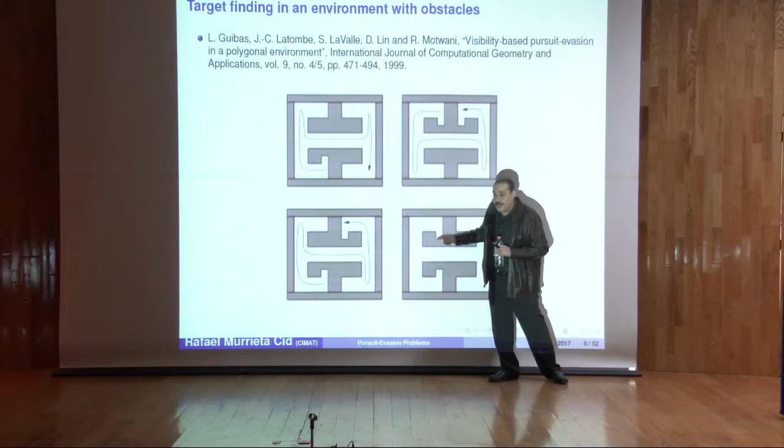So basically, I have to accomplish my first goal. Those are the problems: there are three versions. One is to capture the other, to get closer than a given distance. The other is to try to maintain the other in view. And the third one is one of the guys wants to find the other.

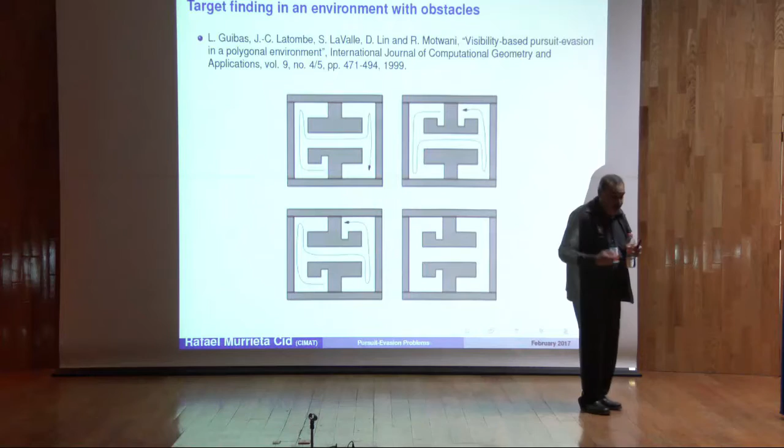And of course, there are some nice applications for that. For instance, automatic cars in supermarkets or airports that can follow you, carrying your luggage or some stuff you want to get with you without carrying it yourself. For instance, this thing.

Or surveillance and monitoring of children. For instance, you can get a robot that is always maintaining visibility of the child while you are, I don't know, in your office and your child is in your house. That would be really nice, and it's not about war, no problems—it's just, I want to surveil a child.

Another application may be convoys of cars, where one car follows another. The first car is driven by a human being, and the other cars automatically follow the first one.

That would actually be very good to reduce traffic jams, because there would be coordination. So there's some possible application. I hadn't worked on drones before, but when Jose invited me, we both thought the theory we'll describe later may be used for drones. It would be very nice to have drones chasing one another, or maintaining formation. So that's the kind of application for future work we have in mind.

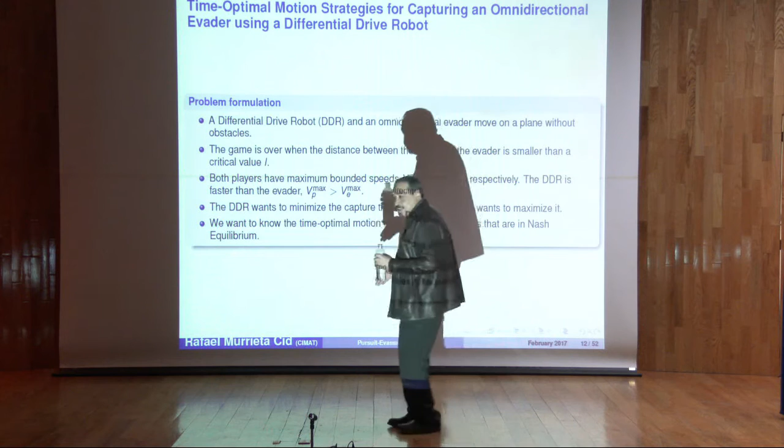We have a differential drive robot and an omnidirectional evader moving in a plane without obstacles. First, what is a DDR robot, a differential drive robot? It's a robot with two wheels that have two independent motors and can be controlled independently, so it can turn in place without translating, unlike a car.

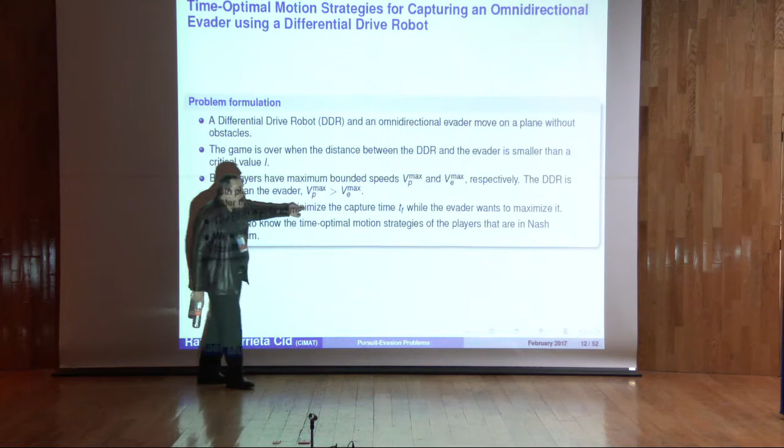Both players have maximum bounded speeds, Vp and Ve, and the robot is faster than the evader, but the evader is more agile. The problem is this: the robot wants to minimize the capture time, and the evader wants to maximize it. So it's a min-max problem. If the capture time is infinite, the evader wins; if the capture time is finite, the pursuer wins.

In these kinds of problems, there are two main games. One is called the game of degree, and the other is the game of kind. The game of kind answers the decision question: which player will win? The second question is how the players should move in order to achieve their goals. So one is just a decision question - who is the winner - and the other is how should the players move.

There is a known problem related to this one, called the homicidal chauffeur problem. In it, you have a car in an unbounded parking lot, and the car wants to run into a pedestrian, while the pedestrian wants to avoid that. The solution to that problem was partially found in the 1960s by Isaacs, the author of the book.

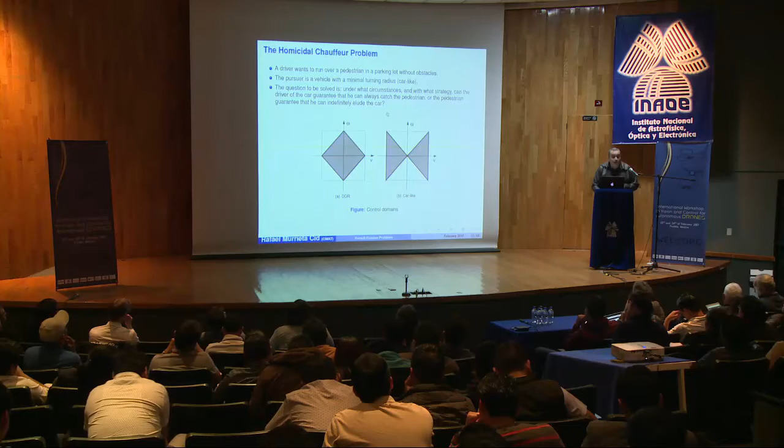This is the difference with the homicidal chauffeur problem. And a way to model the problem is like that.

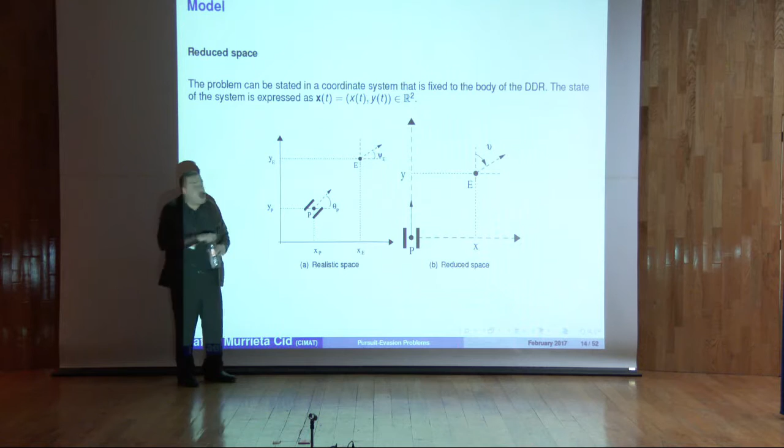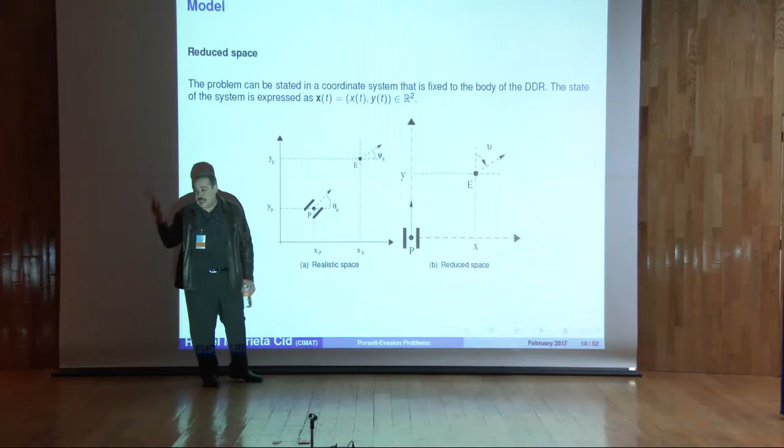You have the Euclidean plane in a reference frame, where if you use a global reference frame, you need 5 numbers to specify the configuration of the system. Those numbers are the position of the pursuer and the orientation of the pursuer, we need 3. And 2 numbers for the position of the evader. The evader is omnidirectional, so basically you don't need a number to describe its orientation. So in this global reference frame, you need 5 numbers, but there is a trick that is called the reduced space.

In this space, everything is local relative to the pursuer. Imagine you are an observer seeing both players playing, far away from them. In this case, you are seated on the pursuer. In this local reference frame, you only need 2 numbers to define the position of the evader with respect to the pursuer. The y-axis of this reference frame is parallel to the wheels of the pursuer. So basically, you get a dimension reduction from 5 to 2, and that makes life easier, because in 2 dimensions you can visualize the solution, while in 5 dimensions, no way. It's like a deterministic PCA, we are reducing the dimension.

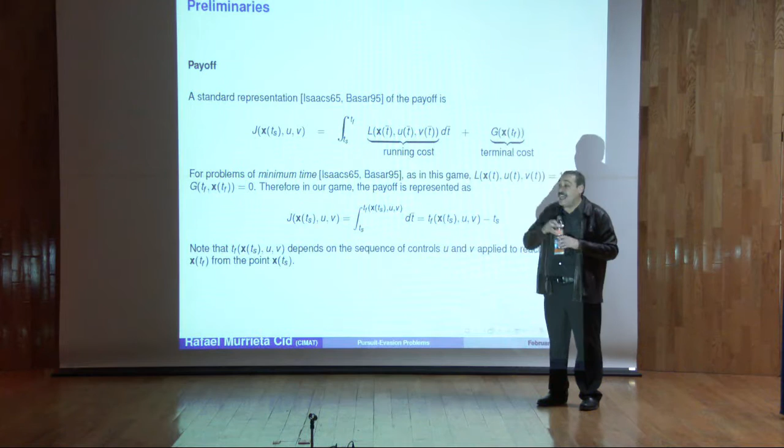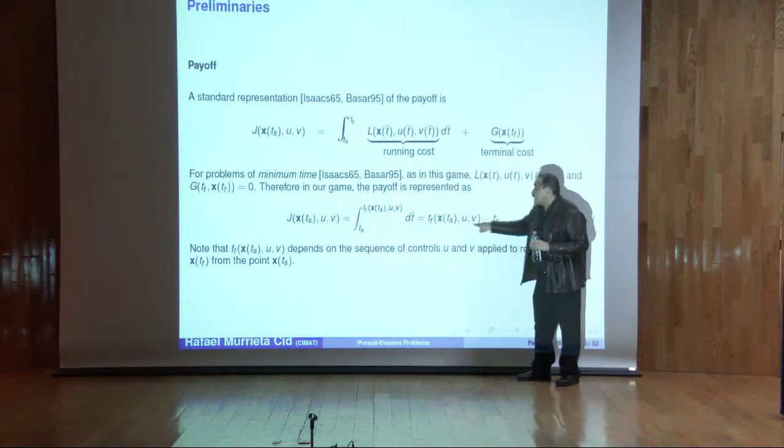There is something called J, the payoff. It's the thing that one guy wants to minimize and the other guy wants to maximize. In the case of this game, it's just time, the elapsed time, which depends on the controls and on the trajectories that the guys follow. But at the end, what matters is the time.

And V, the payoff under the optimal action of the guys, is called the value function of the game. What we basically want to compute is what is unknown. The value function of the game is the payoff under the optimal actions of both guys.

And what we want to get is the Nash equilibrium strategies for those guys. A strategy or a policy, for me, is synonymous, it's just a function. The input of the function is normally the state, and the output of the function is the controls. There are open loop motion policies and closed loop motion policies.

An open loop motion policy is something in which the input is time, so basically what is governing everything is the time. A closed loop motion policy has an input that may be the state, the position in this reduced local reference frame, or even the observation, measures from the robot sensor. But basically, a motion policy is a function that has an input, typically the state, and an output, typically a control.

And this is the tool that we are using: the Pontryagin maximum principle. What is this thing called H? H is called the Hamiltonian of the system. The Hamiltonian of the system in physics is a measure of energy - it's measuring the energy of the system plus the time, or the payoff, that in this case is the time.

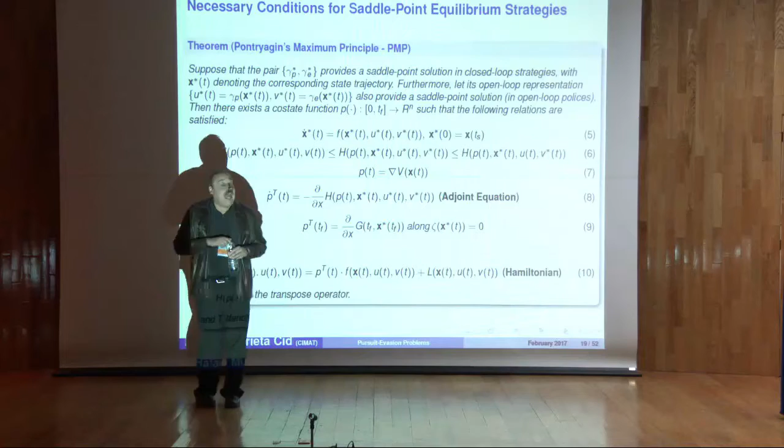And there is something called the adjoint equation that is basically the partial derivative of the Hamiltonian with respect to the state. So to summarize the method: you get a differential equation, you solve this differential equation, you get the gradient of the value function - this thing, what is unknown - and you use that to compute the actual trajectories of the players. The Hamiltonian is a direct function of the controls of the players.

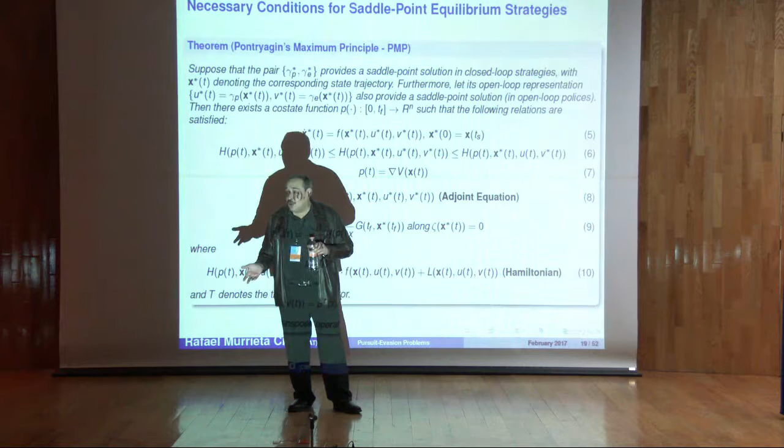One guy wants to minimize the Hamiltonian, and the other guy wants to maximize the Hamiltonian. So what I would like to be remembered is that based on a Hamiltonian, the maximization and minimization of the Hamiltonian is equivalent to solving a differential equation, and with this differential equation, when you solve it, you will get the trajectories. And that's it, that's all the theory.

Now, some results. The optimal controls of the players are the following: for the pursuer, either to move in a straight line at maximal speed, or to turn in place at maximal angular speed. Those are the optimal controls. If you integrate that, you get what we call the optimal motion primitives, which are basically straight lines or rotation in place. And for the evader, the optimal motion strategies are just straight lines in some given direction.

The second question is, who is the winner? And the winner is defined by something called the barrier. Basically it's a dot product between the motion direction of the system, called F, and the normal of a circle that represents the possibility of capturing the evader. So basically, if there is a motion direction that gets into the circle, there is the possibility to capture the other guy, which is equivalent to having a dot product that is smaller than 0.

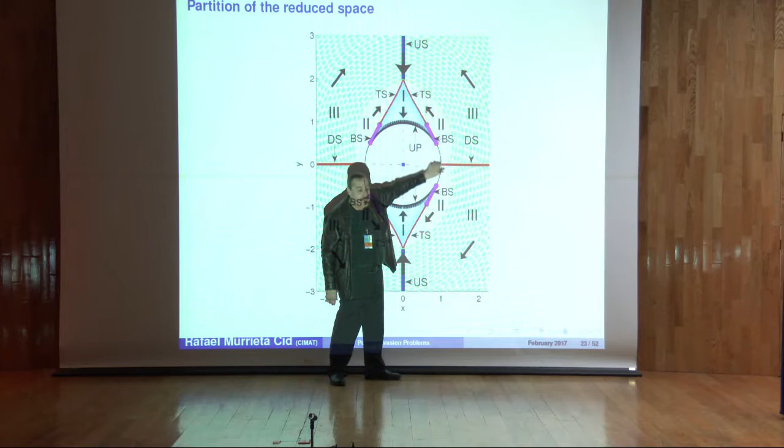And now I will show you the motion policy graphically. This is the motion policy, this is the reduced space. The pursuer is here, the wheels pointing in this direction - this is perpendicular. Let me simplify this.

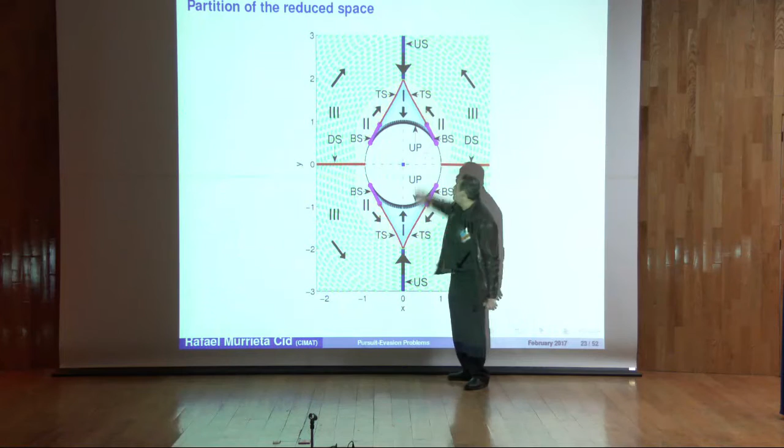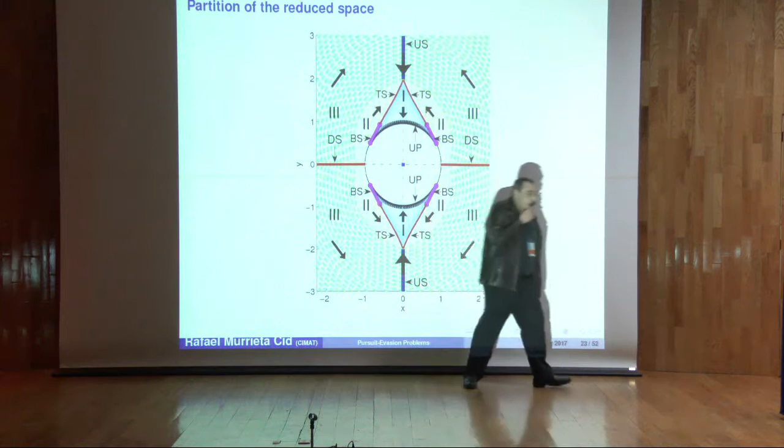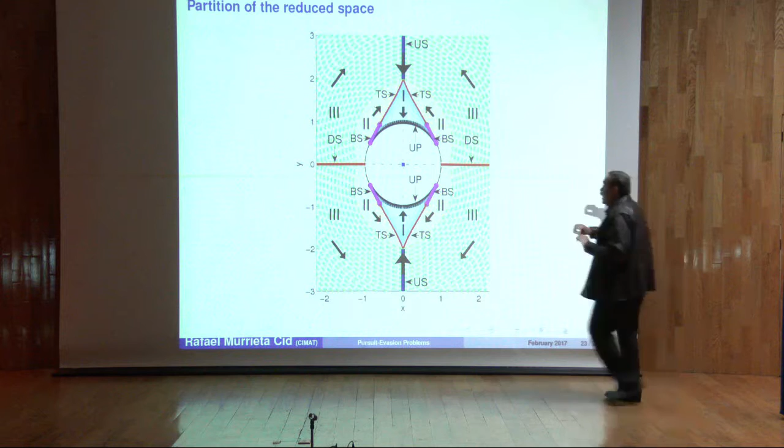Good question. The difference between the yellow and the green is: in one case, you will catch the guy with the wheels pointing in the direction of the line between the center of the reduced space and the body of the evader, and in the other case, you will catch the guy at some angle, not in front of them. But in both cases, the optimal control is the same, just to turn in place. And if the evader is here, the optimal control is just to move in a straight line.

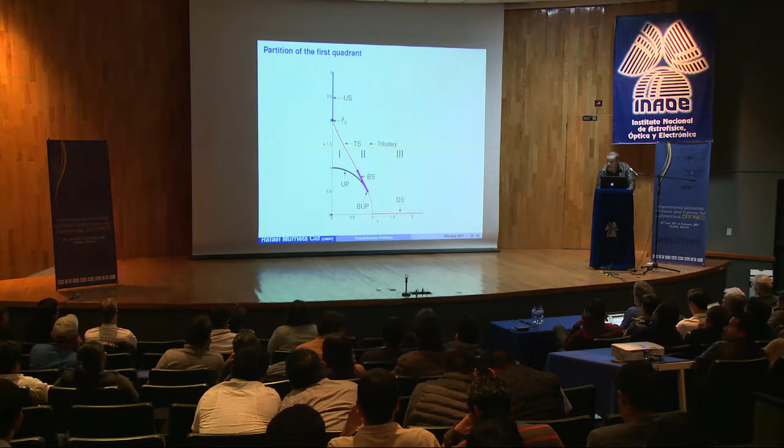So let me show you an example. I hope that will help. This is the optimal motion of the two guys, just to move in a straight line - this is the pursuer, that is the evader, that is the reduced space from the point of view relative to the pursuer, and this is the Euclidean plane. Let me show it again.

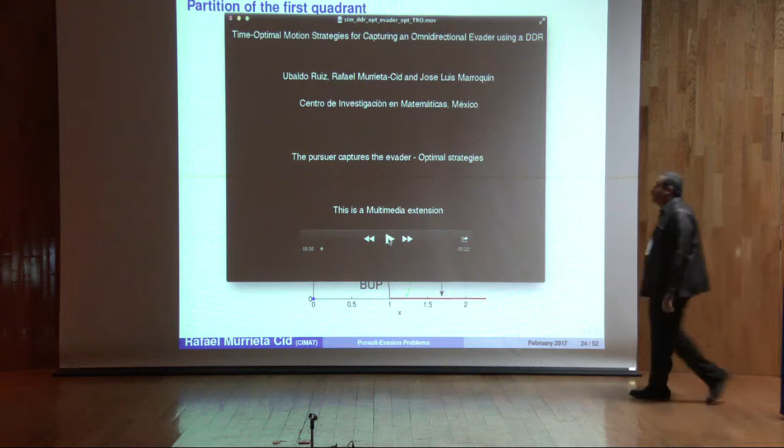This is the evader, moves in a straight line. This is the motion policy that maximizes the capture time, and this is the one that minimizes the capture time. One that I think is more interesting is when the evader avoids capture.

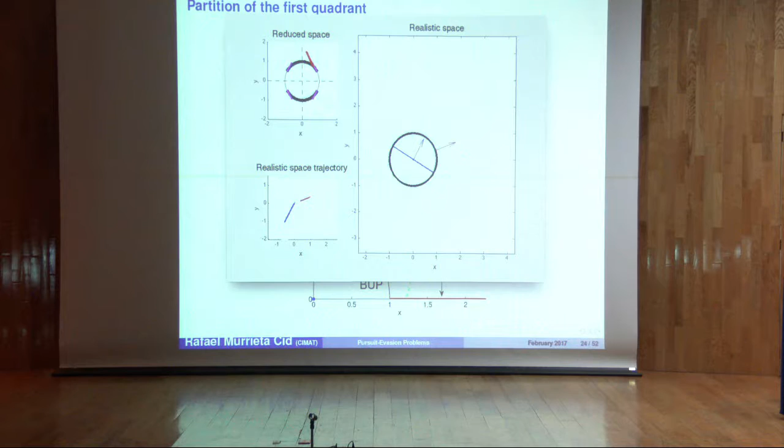This is the most favorable initial condition for the pursuer, just in front of him. But the barrier is closed, and it separates the plane into regions. At this moment, the system starts sliding over the barrier. At a point, the pursuer just touches the evader, but is not able to reduce the distance further, and you get in a cycle that never ends.

Do you get the intuition? It's over and over the same motion direction, and the distance is never reduced at this critical condition, where one guy touches the other but is not able to get closer.

Again, look in the reduced space. The barrier is closed. So the pursuer is changing the motion direction, and the evader is changing the motion direction. The pursuer touches the evader, but never gets closer.

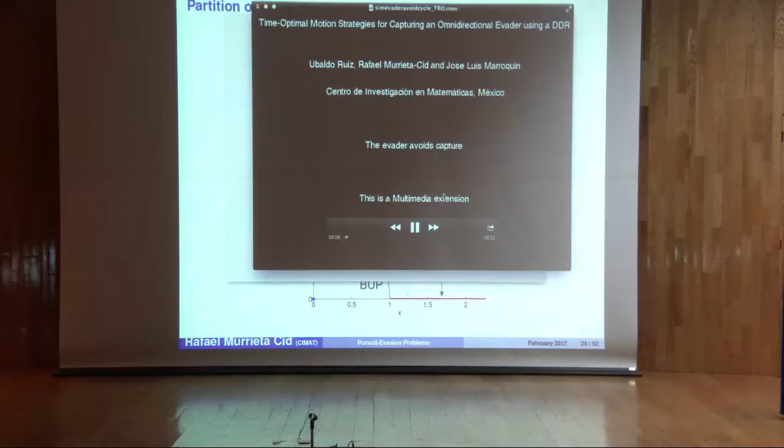I think I'm going to go faster, but I hope I pass the main ideas.

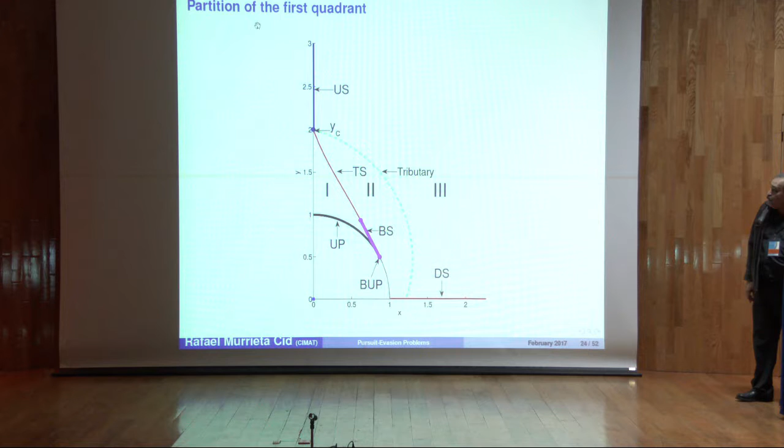One other result is that this partition of the reduced space can be represented as a graph. And the graph has this structure where you don't get this kind of problems, where being in a state is connected with other two states that have the same local cost. That is a problem because it's equivalent to a local minima. You can choose this or that, but at the end you will not know what is the best control to apply.

But that does not happen in our problem. In our problem, the partition of the state space that represents this graph has this structure, and indeed, locally optimal controls are globally optimal controls. It's a pretty nice property, I think we got lucky in that.

Another important thing is that in order to get a closed loop motion policy, you need to know where one guy is with respect to the other. For estimating that, we are using something called the 1D trifocal tensor, which basically uses another local reference frame to know where the pursuer is this time with respect to the evader.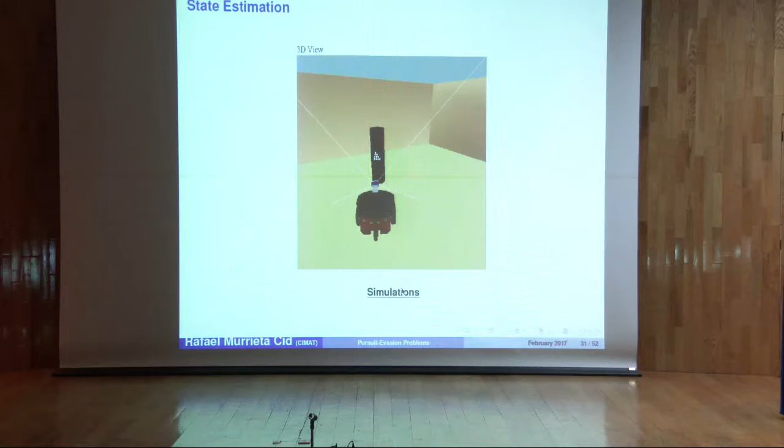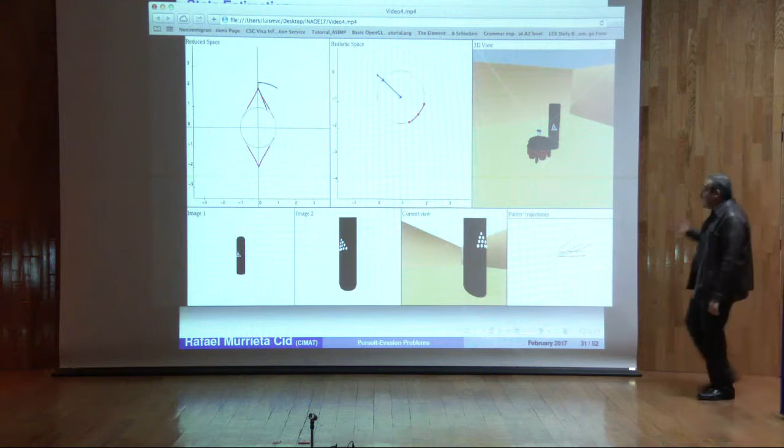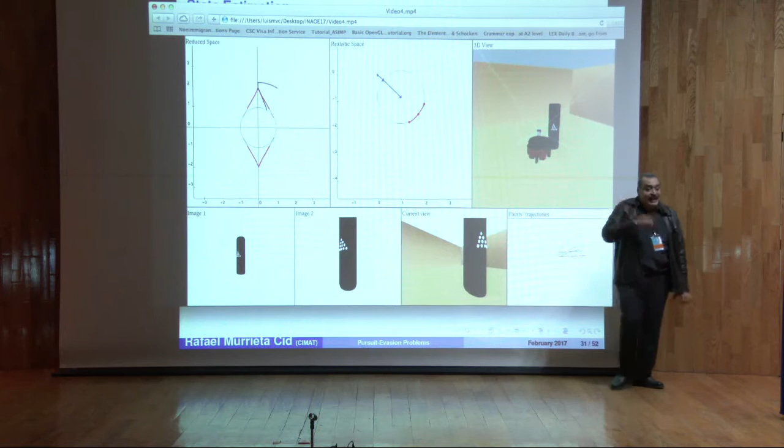And in this way, we can get a motion policy based on feedback, and that is the result. This corresponds to a simulation in a closed loop motion policy where the state of the evader relative to the pursuer is estimated using image, estimating the position of the evader in the local reference frame of the pursuer, where it makes a direct mapping to the motion policy.

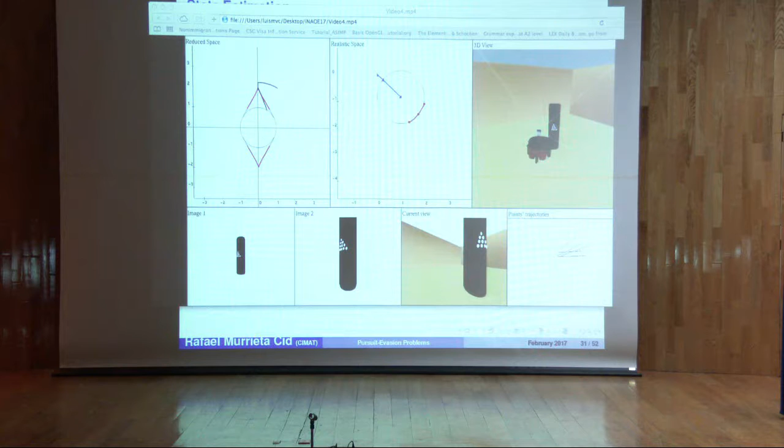So basically that's it, that is the first problem. What I presented are the techniques: the Pontryagin maximum principle, based on the maximization and minimization of the Hamiltonian, which gives the optimal controls of both players. If you integrate this control over time, you get the trajectories. For the evader, the optimal trajectories are just straight lines, and for the pursuer they are straight lines or rotation in place. The decision problem is solved by one inequality that relates the ratio between the maximal speed of one player and the other, and some parameters of the system, such as the capture distance and the distance between the wheels and the center of the robot.

And we get a motion policy in closed form, where you get the state of the evader relative to the pursuer, and you know which are the optimal controls that have to be applied.

Some questions until here? Do you have some questions? No questions? Is it clear, both the problem and the solution? I hope so.

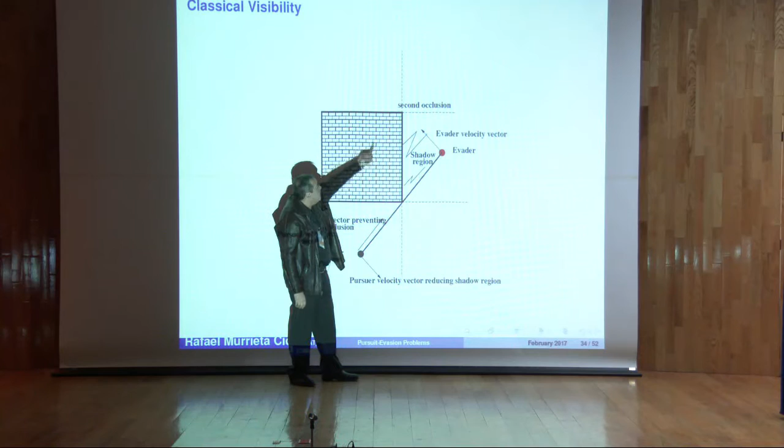However, the evader has the ability to look for a second occlusion, to get and hide behind this other point of escaping. To avoid the second possibility of escaping, the pursuer has to travel in a straight line in this direction, because it's the one that minimizes the distance between this point and this line that will prevent the second occlusion.

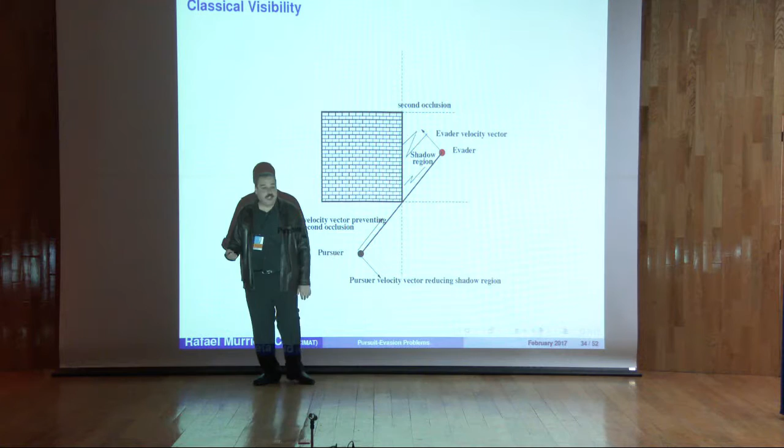So how to combine these two locally optimal motion strategies in order to avoid the escape of the evader in both cases? We don't know how to do that. We have been working for some time on that, and no, not yet. So if you may help us, we will be glad to have any help.

So basically, what we are doing is we prevent the system from getting into this configuration. We say that is too hard for the pursuer. Let's avoid a situation that is that hard for the pursuer. Let's prevent, let's plan ahead on time.

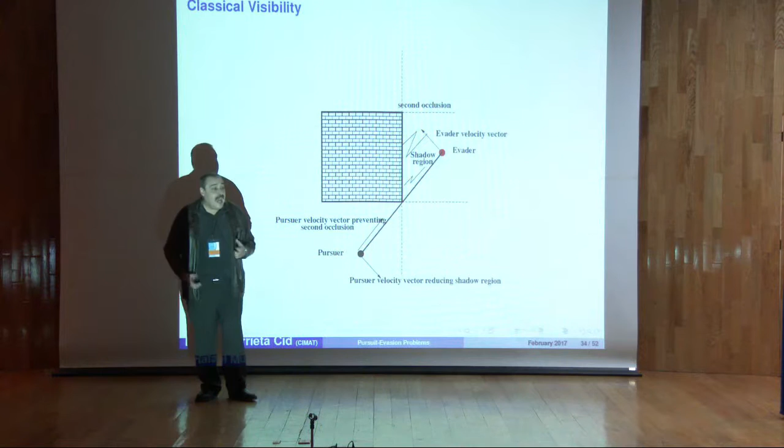And for doing that, we are establishing something that is a strong mutual visibility. A strong mutual visibility is: we divide the environment in a partition, we had regions, not overlapping regions. And one region is said to be strongly mutually visible of the other region if every point in a region sees all the points in the other region.

So basically, we establish, we model the problem like graphs, and this is, I think, the basic idea. The evader can be hidden by an obstacle if it is behind an obstacle. I cannot see through the obstacles. They impose motion and visibility constraints.

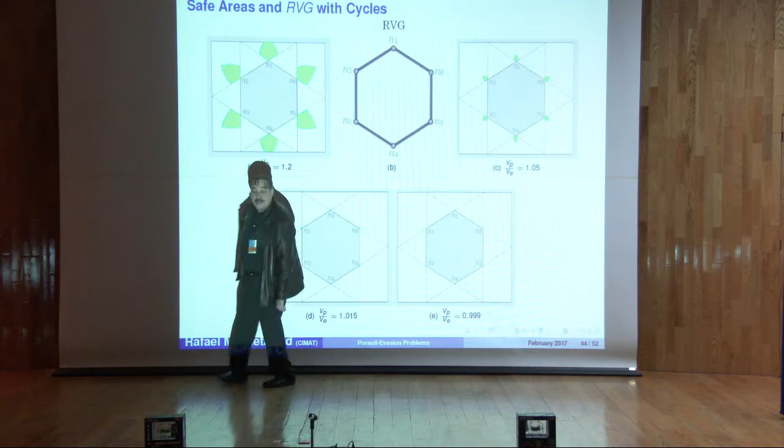So basically, what we are doing is unfolding these graphs into trees, but these trees have to be plotted again, put into a structure like that. And every copy of the tree is a cycle over the obstacle.

But the question is: is this process going to converge in finite time? Or am I going to be turning around an obstacle forever without knowing who the winner is?

And that is what, in theoretical computer science, is called a decidability problem. A very famous decidability problem is the halting problem: is this program going to cycle forever, or is it going to terminate?

So basically, that is the question we are trying to solve: are we able to tell who is the winner in finite time or not?

This is some graphical representation of the solution. The green region is where the pursuer must be at the time when the evader is at a reflex vertex. But our modeling always allows us to have the motion strategy for the pursuer not only at the reflex vertex, but at every instant during the motion of the two guys, and that corresponds to this yellow region here.

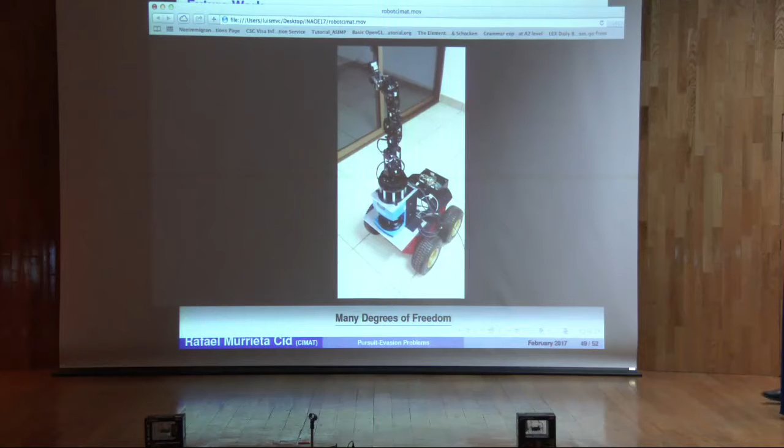Well, our version of that is this thing: a mobile robot with an arm and a camera mounted on the end effector. So basically, it's the same problem in higher dimensions with many degrees of freedom.

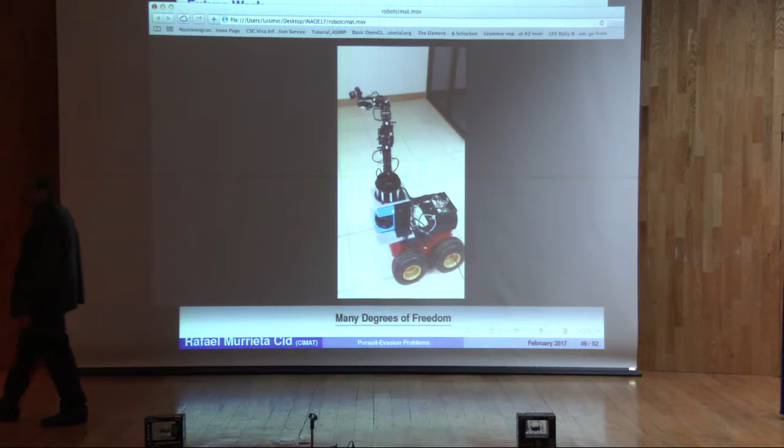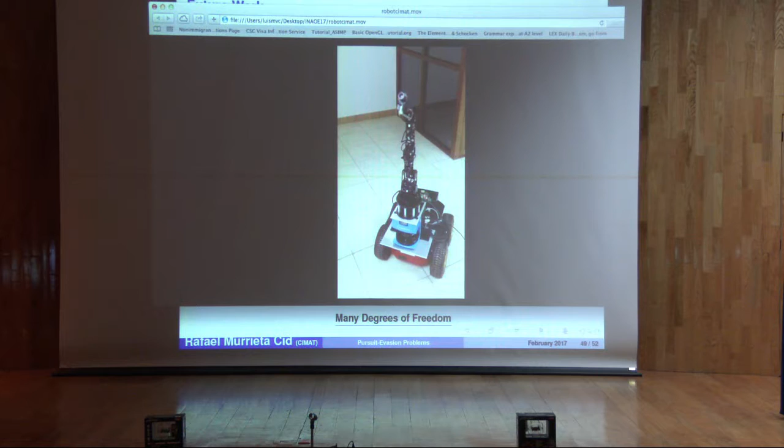And that is something we have been working on for like 2 years, right, Luis? Luis, who is a postdoc here, was my PhD student, and that is his video, and it was his future work, which is still future work.

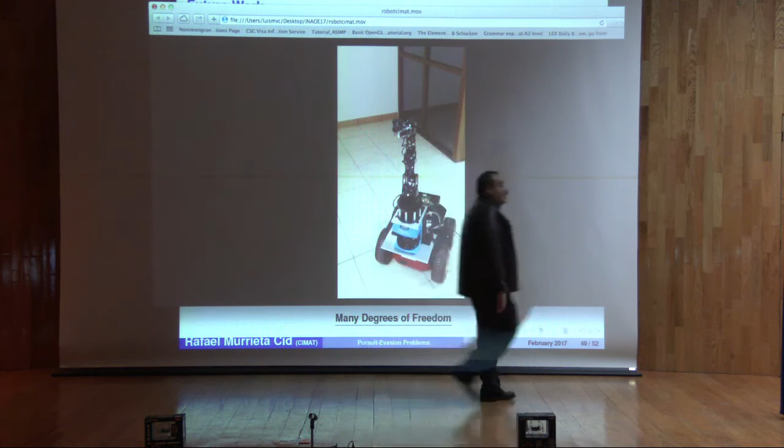So I think I am done. If you have questions, I will try to answer.